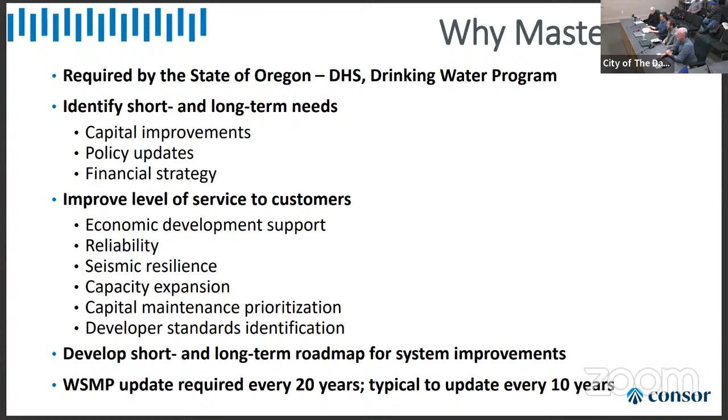Ideally, it guides capital investments and the overall planning. And again, as I said, it's required at a minimum of every 20 years. For communities that are growing, it's typical to update approximately every 10 years, so somewhere in that range. And it is a couple-year process, so something you want to start and maintain. And it's dependent on the types of growth and change that's happening in the water system. The city's experiencing a fair amount of growth. Infrastructure is getting old. It is time to do a plan, and so that's why we're doing it today.

So this is just a kind of quick overview of what's in the plan, and we break it up into 4 parts. Kind of the foundational piece first is an inventory of the water system. So that's a chapter that's written, unfortunately, still pretty engineering, but the idea is that it provides an overview of how water gets distributed to customers. So it's a nice, useful tool for the public as well as for public works staff and the water system operators.

And then water demand forecast. So we want to look and see how is the community using water today and how will water be used in the future, because we need to plan for that future condition. Where is the city growing? Where is there going to be additional water use? How might water use change over time? And then the performance criteria. So we establish the basis of our analysis. What's the performance we want from the system so that when we analyze it, we have a sound basis for that.

That performance criteria gets established through a combination of industry standards, state and federal regulations, and then overall the city's goals and policies related to level of service and performance. Once we get the foundation complete, then we move into the analysis part. So we build a hydraulic model. We calibrate it, so we make sure that the model, the computerized model, reflects the actual performance of the system.

And then we analyze the hydraulics of the system to make sure that there's adequate capacity in the pipelines to move water around the system where demand is. And that's primarily driven by summer demands and the need to meet fire flow conditions. So fire suppression flows at hydrants is a critical driver because that's really when you stress the water system the most. And then we look at supply and treatment needs.

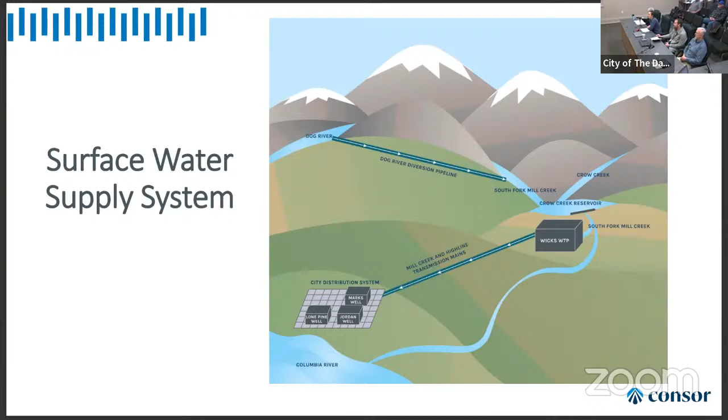Wicks Water Treatment Plant pulls from South Fork Mill Creek and from the reservoir. It treats your surface supply water, and then the Mill Creek and the Highline transmission mains run about 7 miles from the treatment plant to your city distribution system. And that is the surface water portion.

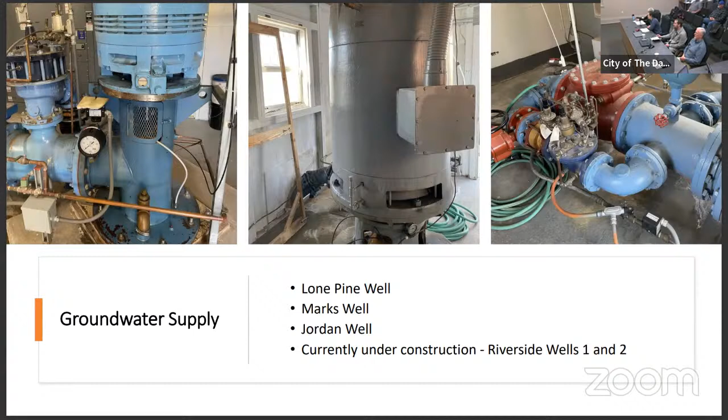The other portion of your supply comes from groundwater. So there are currently 3 existing wells in the city, Lone Pine, Marks, and Jordan. They provide groundwater and they pull from what we call the Dalles Pool Aquifer. And then currently under construction are the Riverside wells 1 and 2. They also pull from the same aquifer.

So it flows by gravity to the southern portion of your town, which is the higher elevation. And then it fills reservoirs and it sort of flows down with pressure reducing valves to other pressure zones. Then the wells are distributed, but they are typically lower elevation. So they are actually pumped up to your storage, which then cascades down to the various pressure zones.

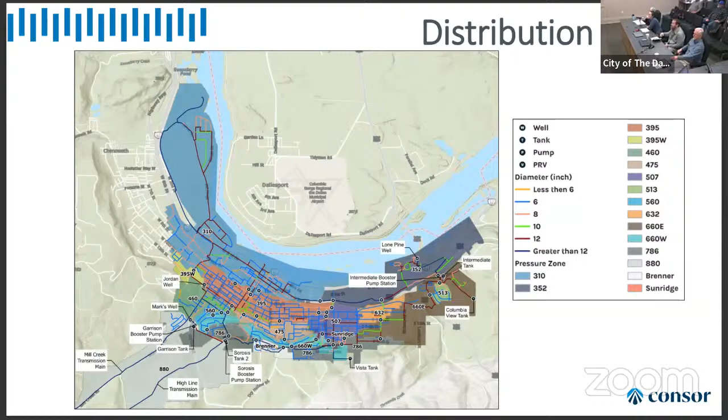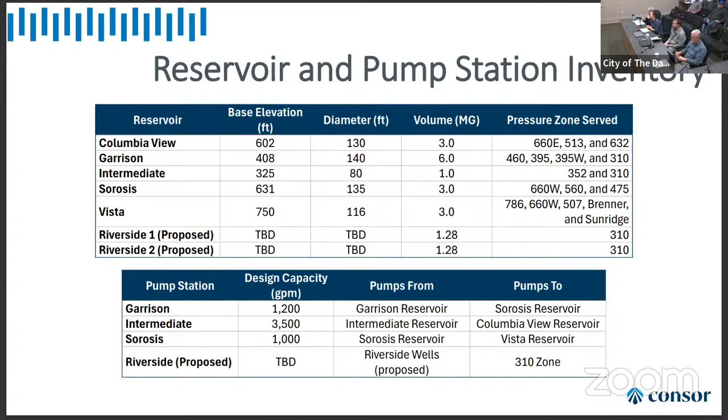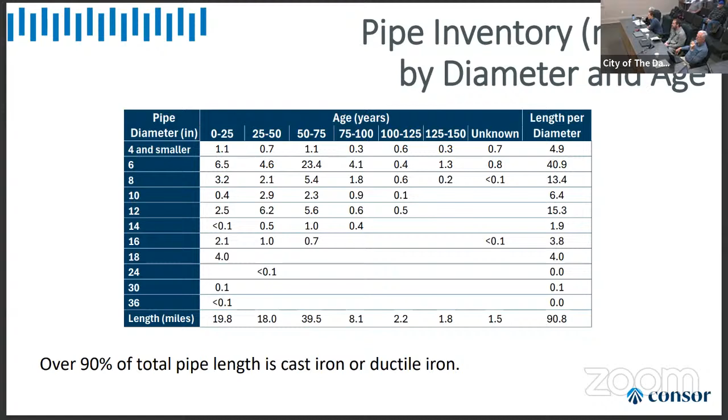It's interesting. I can't tell the difference in some of these colors, but it looks like we have some pipes that we have no idea how old they are. There are indeed a few unknown. It's not significant portions. They're down there toward the river. That's the older part of the city, I would think. Yeah, and it's a variety of things. This is based on the GIS system, so as the GIS system gets updated, these pieces will be updated, but there's not a large piece that we're concerned about.

And I can offer that you're exactly right. Oftentimes those are the oldest parts of the system. Some of it's pre-1900. Wouldn't think it's pre-1850 based on this, but yeah. Thanks.

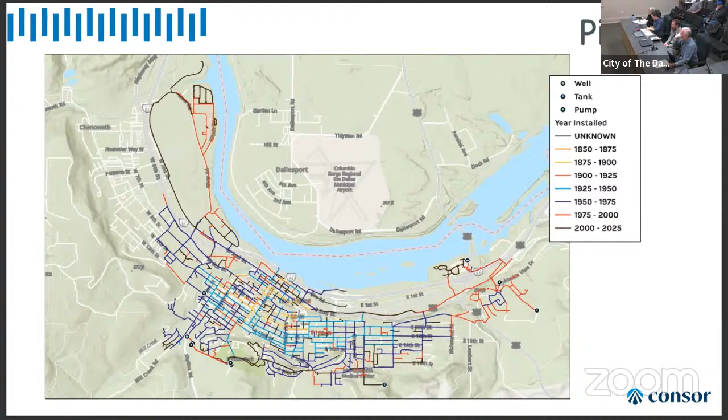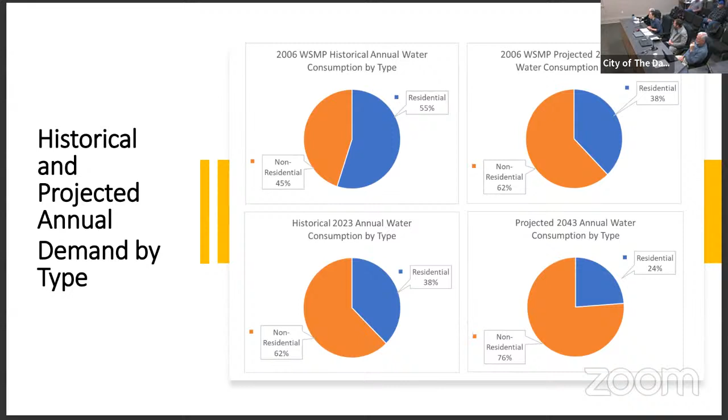So the 2006 master plan was pretty much dead on with what we are seeing now in your usage between residential and non-residential. And as you can see, the orange portion is growing, so the non-residential demands are increasing in your system over time. The 2006 plan identified that and was planning for that transition, and it continues that planning through now. That increase in orange is due to Google, right? Largely. It's all of our non-residential, commercial and industrial combined. And there is a portion of governmental use for parks and other things, and that is part of your non-residential use as well.

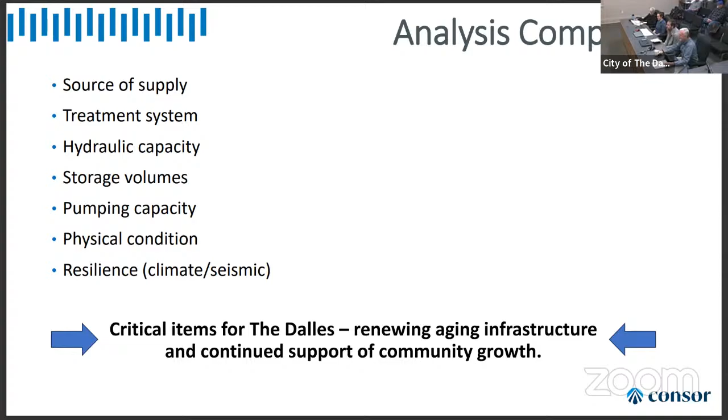So I'll jump into a couple of the topics here, dig a little bit deeper. The first one is to talk about where we are with water supply. As Emily described, you've got this combination of raw water supply or surface water supply from two locations. You've got raw water storage and you've got groundwater. But all of those combined at their current capacities don't meet that long-term need going forward.

So there's going to be a need for supply expansion. And you've got essentially four options, or some combination of four options, that we'll be looking at and bringing back to you. It will be driven by feasibility and cost, and does it meet the long-term needs, the ability to phase the improvements in. Those are the types of things we'll be looking at.

So starting up in the watershed, the first would be to expand Crow Creek Reservoir. Additional raw water storage would allow you to store more of the winter water in the winter and have it available to meet an increasing summer demand through the summer. That's a significant infrastructure improvement, and so not a small cost potentially. So we're going to weigh that against what are your other alternatives.

So as we move down to town, the next option would be the development of what we call ASR, aquifer storage and recovery. The idea here is that you take that extra winter surface water, and instead of storing it up in Crow Creek Reservoir, you transmit it down to town. It gets recharged into those wells that you have in the city. So it could be either your existing wells, the future Riverside wells, or wells that we haven't even contemplated yet, stored in the same aquifer that you're drawing groundwater from. It creates a bubble of surface water, so you're filling the bathtub up essentially so that you've got more water available to pump in the summertime.

I think that's part of the spoiler alert, as far as it being a combination of options. Yep, that's exactly right. ASR is the one that complements the others. If you look at the other three, those are all very significant capital cost, long-term projects. ASR has the potential to both be a bridge to one of those future solutions and then also to complement those other options, to be able to reduce some of the cost and spread it out over time.

And I guess just to close the loop on that, it won't be the end of the discussion about ASR, but just as an update, one of the two new wells that's just been drilled on the port, Riverside 1 and 2 - one of those is an ASR well. So we are going online probably this next winter with the first ASR well.

I guess, not to drill too deeply at this point, but my question being really, that's a potential that we had hoped for, was that we would get storage capacity. I don't know that we've discussed whether that's a reality or a certainty yet. I think you're going to touch on that.

Yeah, and I can do it now actually. So yeah, I mean ASR is not a guarantee. I should be more specific. Any work when you're talking about groundwater has a level of uncertainty to it.

So first, is there water available in the aquifer? We know that because you've got multiple wells in the aquifer already. And then secondly, at the location where the well is drilled, is the water there? That is not a given, we've learned in groundwater. So there's risk at that step.

The next step is, is the water that's there accessible at the well? So the formation itself - can you get the water at the rate you want without drawing down the aquifer too much around the well? That becomes the next thing. And then the reverse of that, which is if you can pump the water out, then do you have the ability to also recharge the aquifer at that location?

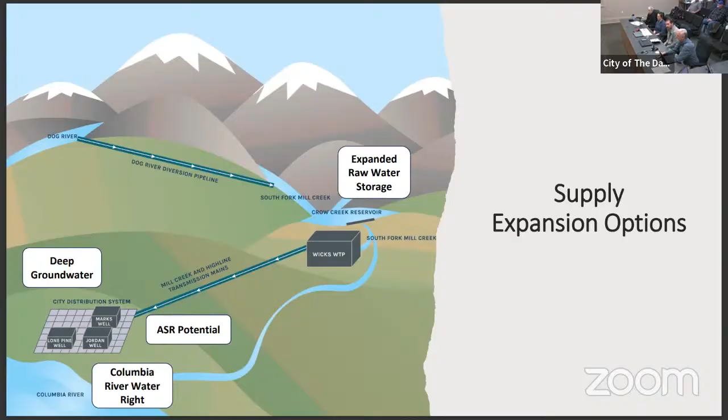I won't talk too much on this one other than to say the Wicks water treatment plant has both challenges and opportunities. So the challenge is it is aging. The plant has been well run by a series of operators who have kept it going probably well beyond the typical service life of a water treatment plant. It continues to serve the city well, but a lot of that infrastructure at the plant has reached the end of its life.

As we look at source options, we'll be looking at, okay, well, what capacity of water do we need to be able to treat at Wicks, both in the winter and in the summer?

So that's going to be a change from where you're at today. Winter treatment needs could increase significantly with ASR because we need to treat more water to be able to bring it down and store it in the aquifer. Summer treatment needs are going to continue to increase, but we want to make sure that that treatment capacity is aligned with the total capacity of your surface water source.

So we're starting to get to all these intermixed variables now where we need to think about what's the right plan for Wicks in the future, knowing where your long-term water supply is going to come from. It likely means over time a change in treatment technology to some degree, to more modern technologies that better treat winter cold water. You get very cold water coming down out of the Crow Creek watershed, which creates a number of challenges, as well as some variations in summer usage.

And so we want a plant going forward that is resilient and reliable for the range of water quality conditions we're anticipating looking forward to its next 50 years of operation. And then how do you implement those improvements while continuing to maintain operation of the plant? And so this will be, again, a significant capital project. You will see when we come back to you with the plan a phased implementation of upgrades at the Wicks water treatment plant.

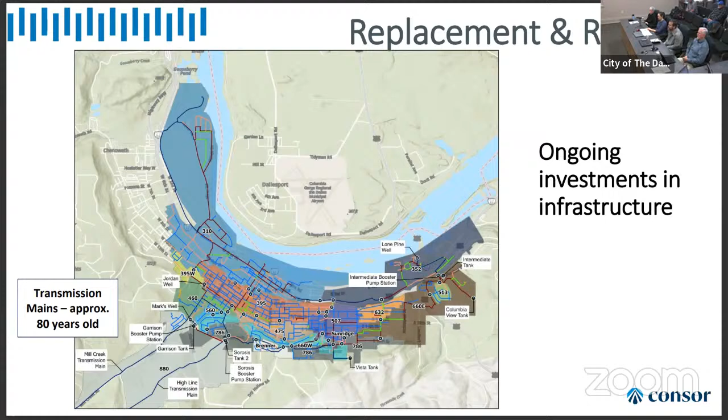And with that, turn it over to Deb. Just a quick question about that issue. I would hope that there's been many advances in the materials that are made that we don't have to worry about significant leakage and things like energy with the advancements in materials, for example. Could you?

Yeah. So as we said earlier, most of the older piping is cast iron pipe, and cast iron pipe has gone through some interesting evolutions to now modern ductile iron pipe, which is really just a variation on cast. Early turn of the century, 1900s, cast iron pipe that you still have in the ground is some of the most reliable pipe that's there. Interestingly enough, it's lasted 100 years and may go another 100 years.

We've seen 1920s pipe that under the right conditions has not performed well. For whatever reason, 1950s cast iron fails at an amazing rate. It's unbelievable how poorly it has performed. In the 60s and 70s, we put in a lot of less expensive pipeline materials. Thankfully, The Dalles does not have a lot of that.

That was the promise of less expensive, lighter weight, longer lasting pipe. They didn't prove out that way. And so as we've gone into ductile iron pipe in the 80s, we've learned more about how pipe can corrode, the kind of failure mechanisms that occur. There's been a lot of advancements in that. And so, yeah, modern ductile iron pipe, we can say with confidence, will typically, under the right conditions, installed correctly and maintained correctly, could have a 75-year life.

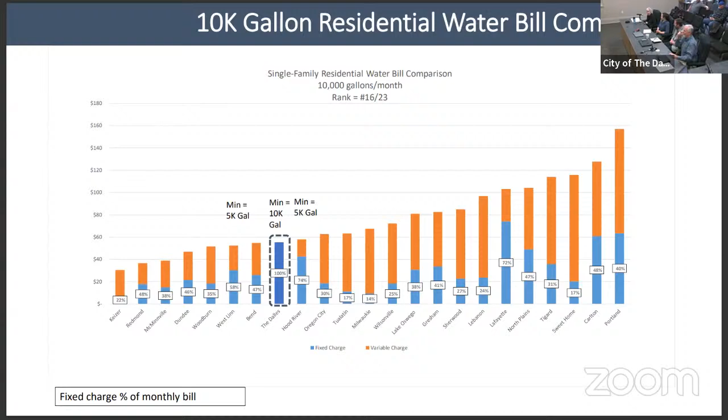Is it 6,500 or 8,000 gallons? Less than a minimum. Oh, less than 10,000. Less than 10,000. Yeah. So that's the percent that are using less than the current minimum. And I didn't calculate, if we go down to 7,500, what percent is that, or 5,000? We can certainly provide all that information.

The challenge of, we've got a lot of dials that we're turning here, potentially, that are going to impact individual customer bills. One of them is the overall revenue needs and whether any general rate increases are going to be needed. How costs may or may not shift between residential and non-residential as part of the cost of service analysis. So it may be that overall residential costs go down or up, and then within the class. So, if we look at different options for the minimum charge, that shifts costs to higher volume users.

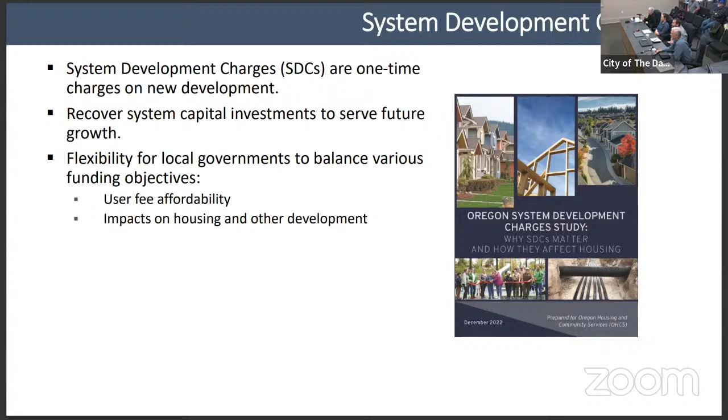So we are required under Oregon law, if you're going to implement a new SDC and SDC methodology, to meet certain requirements. We have to take the project list from the master plan. We have to identify what the costs of each project are, the approximate timing, and how much is related to future growth, expansion versus rehabilitation, replacement of existing infrastructure.

The methodology then is that framework. For some of these projects, it serves a dual purpose, to maybe raise the level of performance of existing infrastructure. Is that a benefit to existing development or future development? So within the methodology, what factors are we going to look at? Are we looking at fire protection, peak demands, or just average demands? That is kind of the core, and I work closely with Consor to evaluate each of those projects and how we're going to determine the growth share.

The ultimate decision of council is, we can take the project list and this methodology, and the product of those two things is the SDCs that come out of that, but it establishes basically the maximum allowable, we call it. That's not a defined term in statute, but the point is that council decides what fee level you want to charge and how best to balance the affordability. And let's go to the next slide of the rates and the SDCs, because the SDCs are an important part of funding

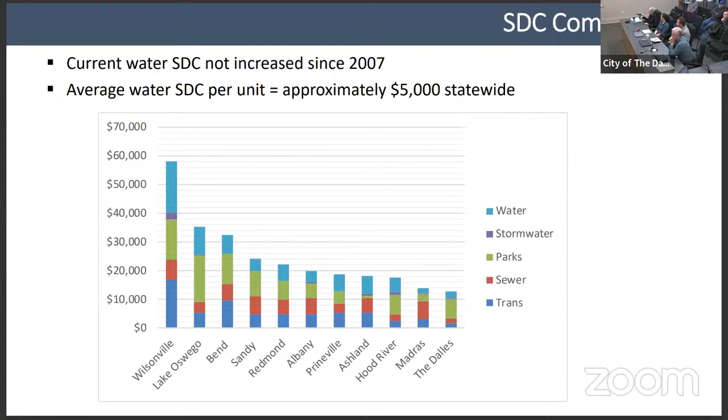So you can see that both in terms of water and in terms of total, standing parks being quite large, you are still lowest of these communities, which I think is pretty representative statewide of the range of this. There are still some communities that don't charge SDCs, Pendleton for example, and some others in Eastern Oregon. Pendleton is looking to develop those. So there are some that are 0 for water and 0 overall. Okay, next slide, that's my quick thing on SDCs.

I think key policy issues, we've already talked about rates. On the SDCs, we'll give you what comes out of the plan, and the technical analysis says what you could charge. What the council decides to charge is really a local policy decision. We will need to make assumptions in the financial plan and the rates about how much revenue is going to come from SDCs, and that part will be dictated by what council feels is an appropriate level.

And then certainly the design of the SDCs, how you want to consider charges for accessory dwelling units or smaller housing types. Right now you charge based on meter size, and within a given meter size you can have a fair amount of flex in the range of housing units it serves. Do you want special considerations for ADUs or middle housing and non-residential, how we factor in some of the specific higher demands or capacity requirements, like fire protection? We're not looking for specific recommendations today because we don't know. Is the maximum allowable going to be 2 times, 3 times what you charge now? That remains to be seen.